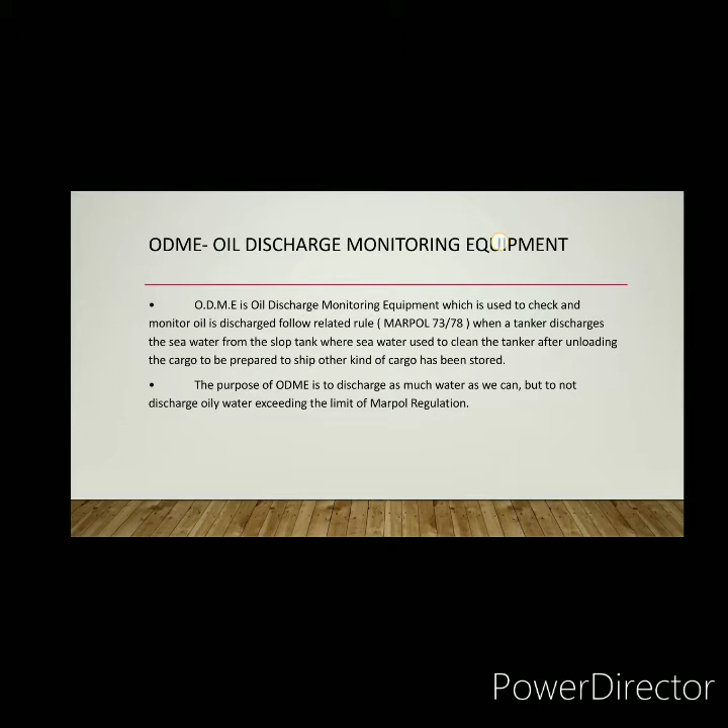Flow rate or flow meter. The ODME computing unit gets the flow rate from the flow meter. A small sample line goes from the main line, passes through the flow meter, and goes back to the main line. The flow meter calculates the flow in m3/hr and gives this value to the computing unit through the signal cable.

So measuring ppm, it is the analyzing unit. We measure ppm in a water sample. The sample water is passed through a quartz glass tube. A sample from the discharged water needs to pass through the measuring unit. This job is done by a sample pump.

The sample pump will take the sample from the discharge line before the discharge valves. This sample is sent to the analyzing unit for measuring the oil content and then sent back into the same discharge line. So this is the process of how it is done.

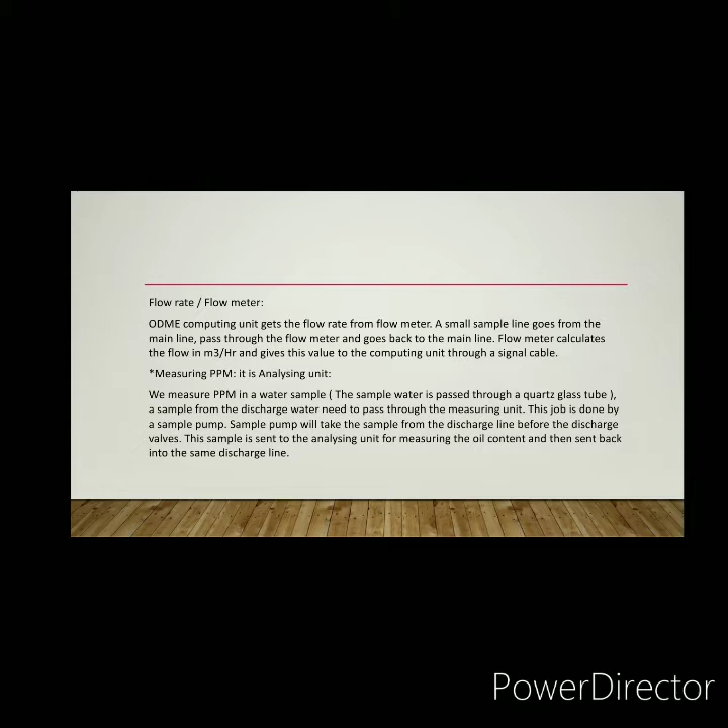and shall be available for use in other tanks where the separation of oil and water is effected and from which it is intended to discharge effluent direct to the sea. An oil water interface detector is an electrical instrument for detecting the boundary between oil and water in tanks. However, the equipment is not limited to oil or water application, but can be used whenever an accurate interface control between two liquids is necessary.

Generally, both fixed and portable type interface detectors are an important part of cargo operation equipment on ships. The portable ones are more widely used because of the ease of handling and maintenance. How an interface detector on ships works: the interface detector consists of two main parts, the sensor antenna and the display control system.

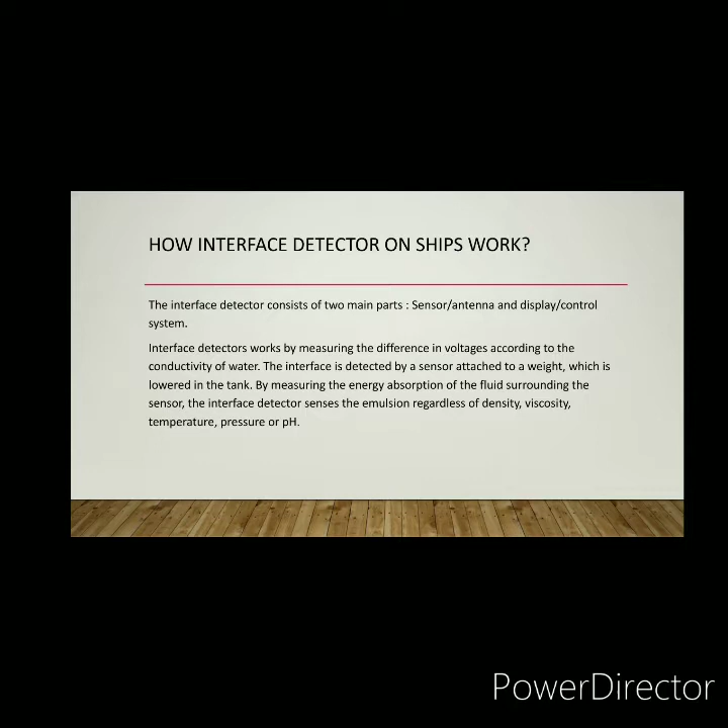Interface detectors work by measuring the difference of voltages according to the conductivity of the water. The interface is detected by a sensor attached to the weight, which is lowered in the tank, by measuring the energy absorption of the fluid surrounding the sensor, and the interface detector senses the emulsion regardless of density and viscosity, temperature, pressure, or pH. So that is how the interface detector works.

Let's proceed to another equipment. What is an oily water separator, or OWS? An oily water separator, or OWS, is a piece of equipment specific to the shipping or marine industry. It is used to separate oil and water mixtures into their separate components.

They are used to separate oil from oily wastewater, such as bilge water, before the wastewater is discharged into the environment. This discharge of wastewater must comply with the requirements laid out in MARPOL 73/78.

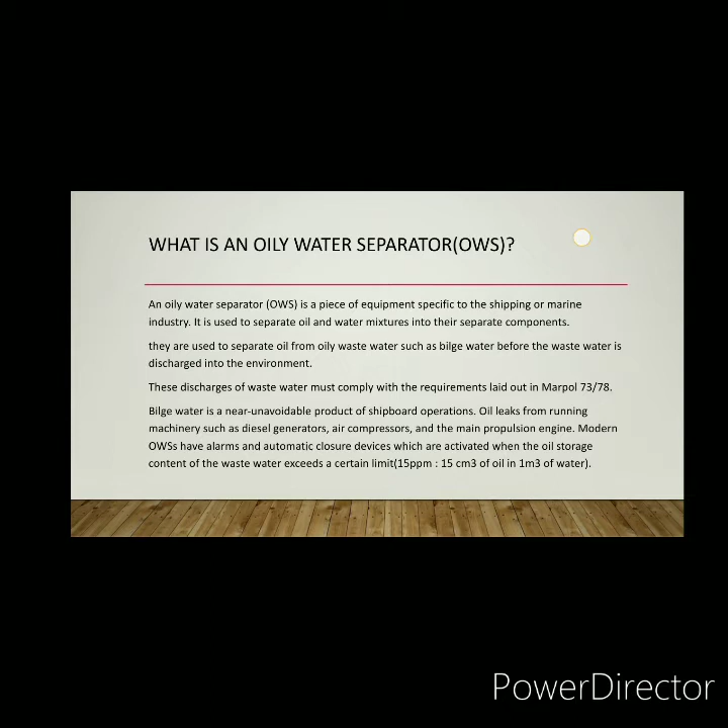So what is the purpose of OWS? The primary purpose of a shipboard oily water separator is to separate oil and other contaminants that could be harmful for the oceans. Each OWS must be able to achieve clean bilge water under 15 ppm of type C oil or heavily emulsified oil and any other contaminants that may be found.

All oil content monitors (OCM) must be tamper-proof. Also, whenever the OWS is being cleaned out, the OCM must be active.

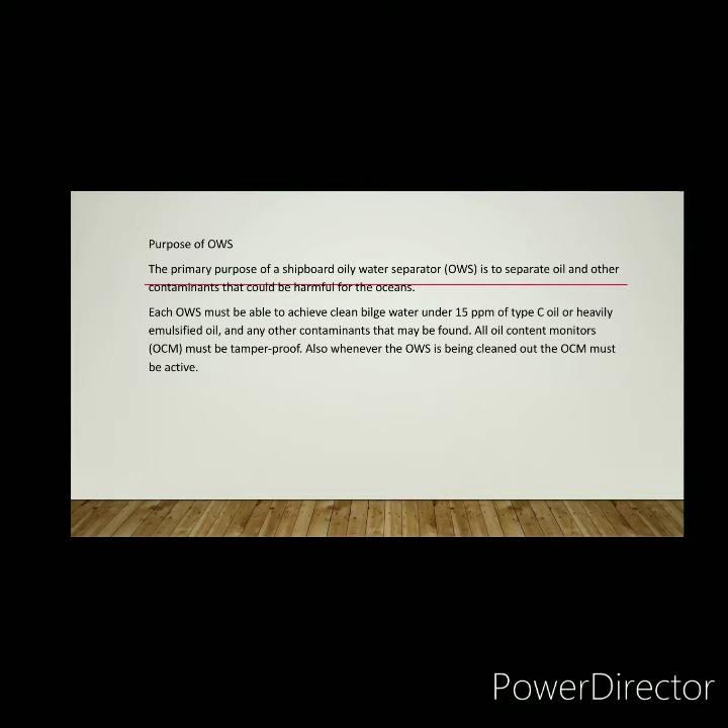So what is a port facility reception? The merchant fleet of ships in the shipping industry is generally divided into two main categories: dry ships, which carry dry cargo in bulk, and wet ships, which carry liquid cargo in bulk. Both of these types of ships generate oily residue mixture and garbage during their normal shipping and cargo carrying operation at ship and at port.

The oil residue mixture and garbage generated by the vessel cannot be discharged directly to the sea as per the law to avoid marine pollution, and hence they are disposed to the port reception facility all around the world.

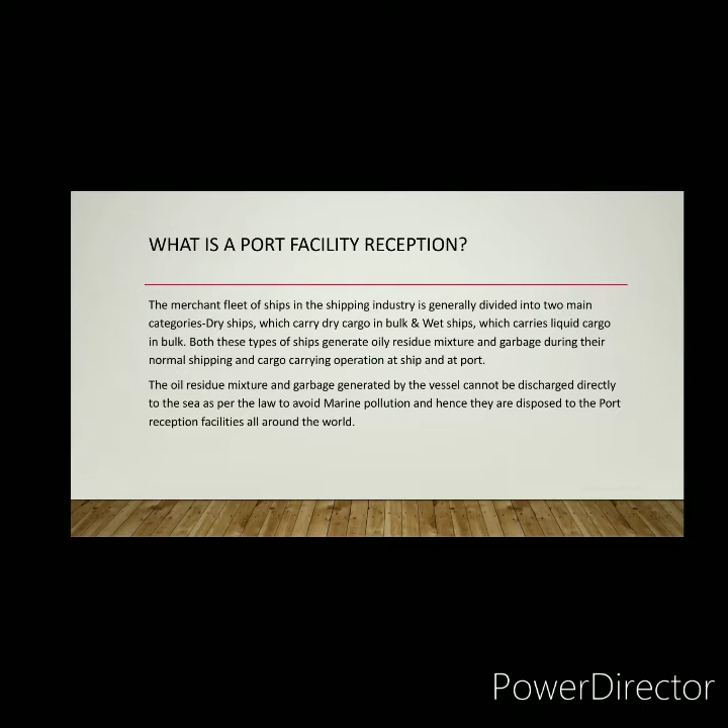What is Ship Oil Pollution Emergency Plan, or SOPEP? So it is a prevention plan carried on board tankers greater than 150 gross tonnage and other vessels greater than 400 gross tonnage. So in this plan, you'll get an overview of possible procedures in case of an oil spill and what is the purpose of the plan.

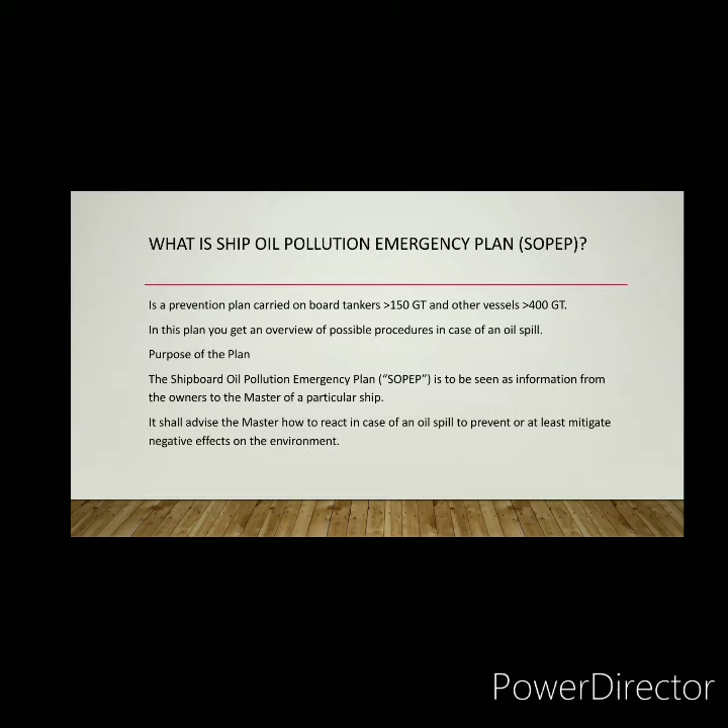So the Shipboard Oil Pollution Emergency Plan, or SOPEP, is to be seen as information from the owners to the master of a particular ship. So it shall advise the master how to react in case of an oil spill to prevent or at least mitigate negative effects on the environment.

So International Convention for the control and management of ships' ballast water and sediments. So BWM. Entry into force 12 months after ratification by 30 states, representing 35% of world merchant shipping tonnage. In order to reduce the harmful effect on the marine environment that is spread through aquatic microorganisms transferred from one area to another through ballasting operations of the ship.

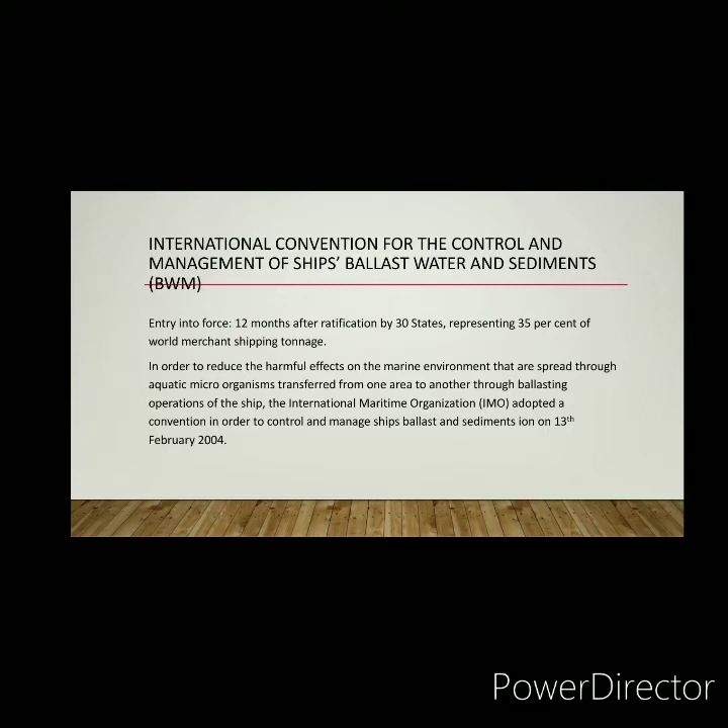So the International Maritime Organization or IMO adopted a convention in order to control and manage ships' ballast and sedimentation on 13th February 2004. So kani siya nakuha na siya nga kuan in order to control and manage ships' ballast and sedimentation.

Advantage of ballast water management plan. With the help of a proper ballast management plan and some additional information, operational delays can be avoided, which will help to save time and money. Reporting requirements to different port state authorities is simplified. And the most important of all is that a safe ballast exchange can be carried out anywhere in the world. So, free ni siya sa tanan.

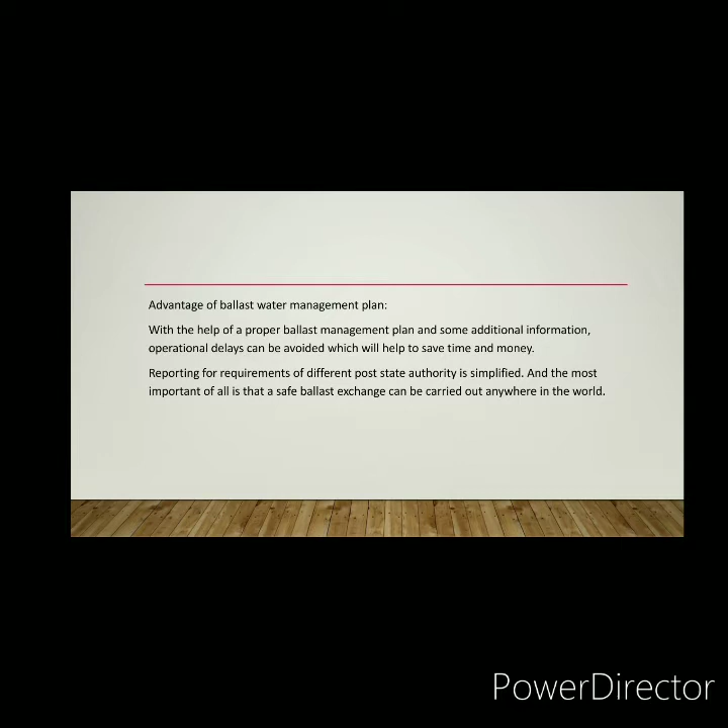We are done with our topic 1, which is the different equipment. So, let's proceed to topic 2, which is the different documents required by the annexes. So, first, the International Oil Pollution Prevention or IOPP certificate. It is required by MARPOL Annex 1, Regulation for the Prevention of Pollution by Oil. Regulation 6, oil tankers of 150 gross tonnage and above and other ships of 400 gross tonnage and above.

So, what surveys are required? Initial survey, renewal survey every 5 years, intermediate survey not earlier than 6 months before and not later than 6 months after the halfway date of the period of validity of the certificate. And annual survey within 3 months before or after each anniversary date of the certificate.

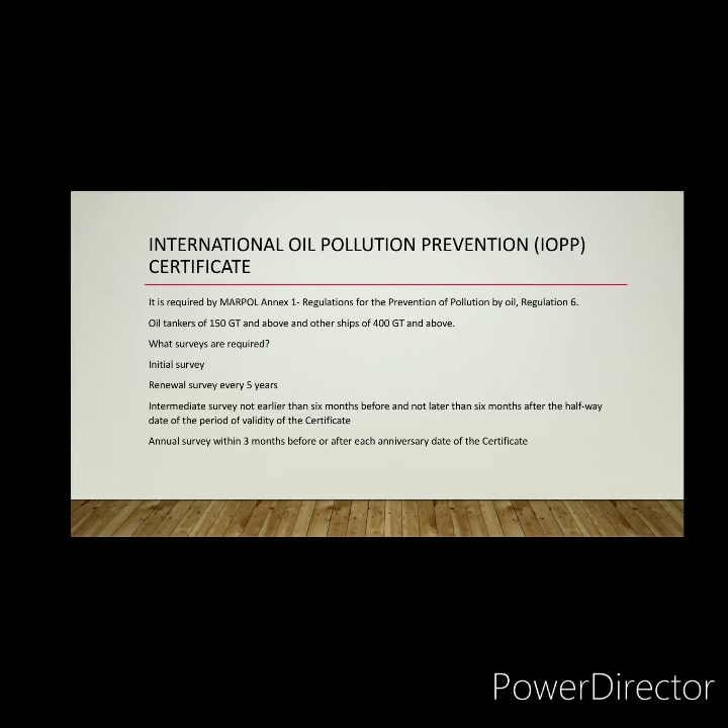Supplement to the International Oil Pollution Prevention Certificate. So, supplement to the IOPP, the equipment listed. These records will be permanently attached to the IOPP certificate and form a useful guide to the scope of an IOPP survey. There are two formats for this supplement. Form A is record of construction and equipment for ships other than oil tankers, and Form B is record of construction and equipment for oil tankers.

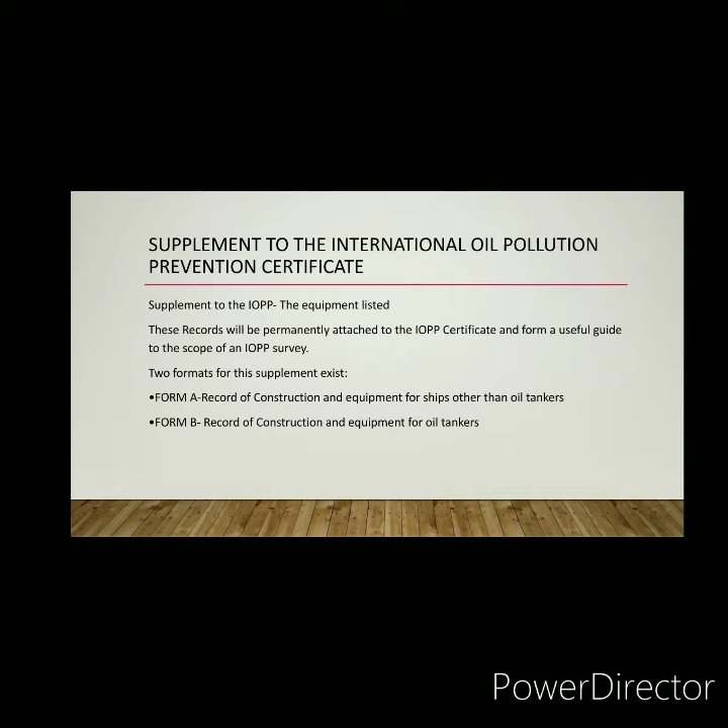So the Form A is record of construction and equipment for ships other than oil tankers. So particulars of ship, equipment for the control of oil discharge from machinery space bilges and oil fuel tanks, MARPOL Regulation 16 and 14. Means for retention and disposal of oil residues or sludge, MARPOL Regulation 12, and oily bilge water holding tanks.

And the Form B is the record of construction and equipment for oil tankers. So, same as the previous one, particulars of the ship, the equipment for the control of oil discharge from machinery space bilges and oil fuel tanks, MARPOL Regulation 16 and 14. So means for retention and disposal of oil residues or sludge, MARPOL Regulation 12, and oily bilge water holding tanks.

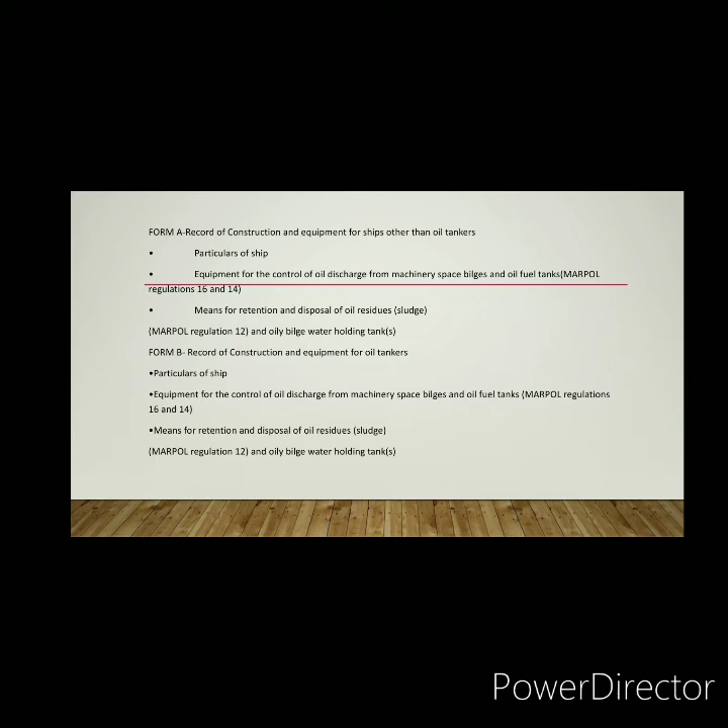International Pollution Prevention Certificate for the carriage of noxious liquid substances in bulk. The NLS certificate, carrying chemicals. Why is it required? It is required by MARPOL Annex 2. What does it certify? That the ship has been surveyed in accordance with Regulation 8 of Annex 2 of MARPOL, that the survey showed that the structure, equipment, systems, fittings, arrangements, and material of the ship and the condition thereof are in all respects satisfactory, and that the ship complies with the applicable requirements of Annex 2 of MARPOL.

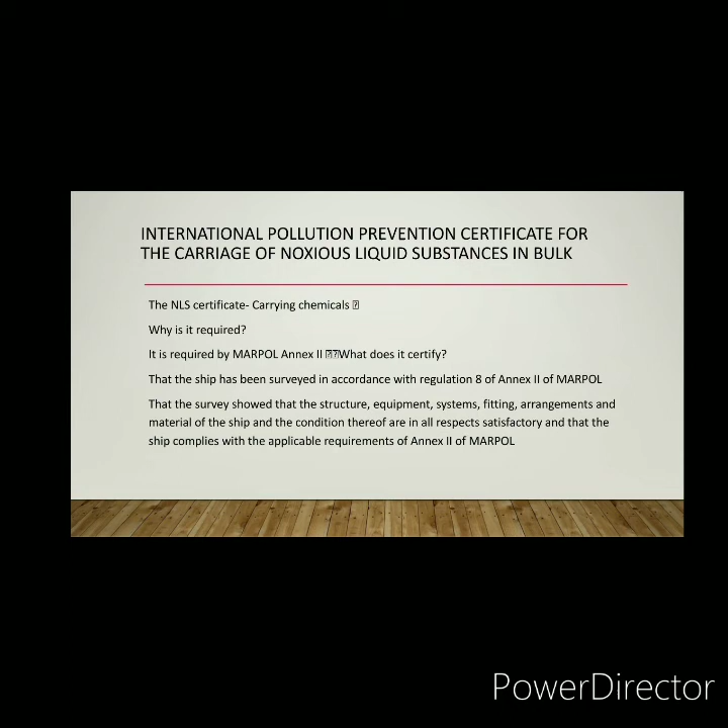So what are NLS categories? So category X, noxious liquid substances which if discharged into the sea from tank cleaning or deballasting operations are deemed to present a major hazard to either marine resources or human health, and therefore justify the prohibition of the discharge into the marine environment.

So the category Y, noxious liquid substances which if discharged into the sea from tank cleaning or deballasting operations are deemed to present a hazard to either marine resources or human health, or cause harm to amenities or other legitimate uses of the sea, and therefore justify a limitation on the quality and quantity of the discharge into the marine environment.

So the category Z, noxious liquid substances which if discharged into the sea from tank cleaning or deballasting operations are deemed to present a minor hazard to either marine resources or human health, and therefore justify less stringent restrictions on the quality and quantity of the discharge into the marine environment. So category X presents a major hazard. Category Y is hazardous but not major, and category Z is a minor hazard.

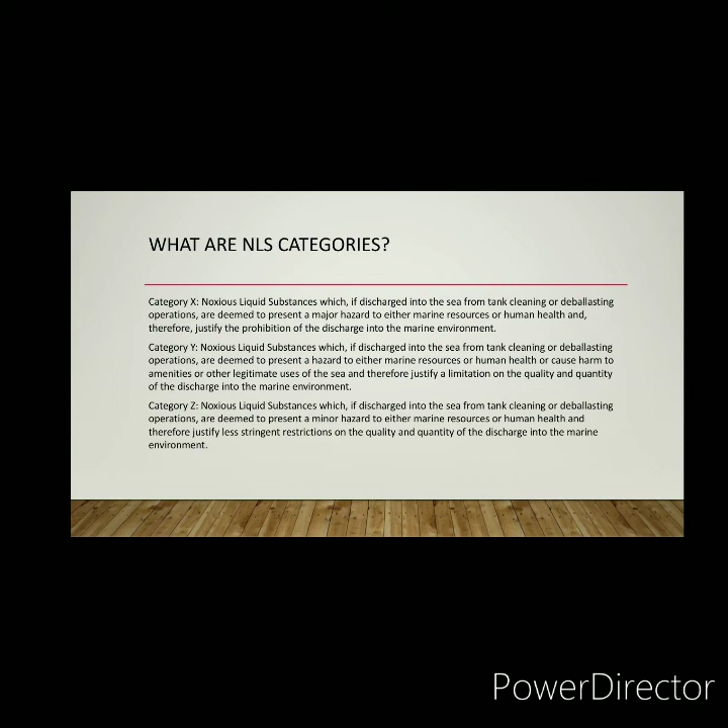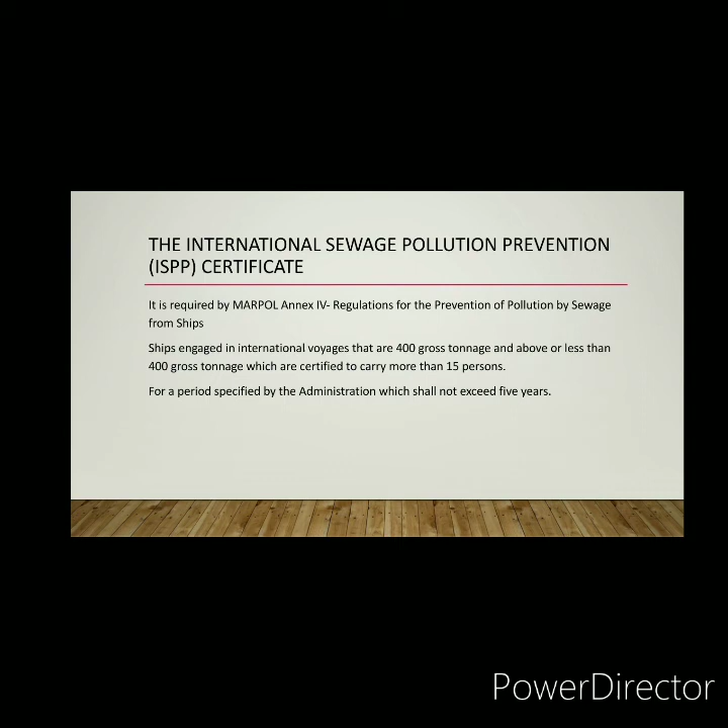The International Sewage Pollution Prevention or ISPP certificate. It is required by MARPOL Annex 4, regulations for the prevention of pollution by sewage from ships. Ships engaged in international voyages that are 400 gross tonnage and above, or less than 400 gross tonnage which are certified to carry more than 15 persons, for a period specified by the administration, which shall not exceed 5 years.

International Air Pollution Prevention Certificate or IAPPC, keeping the air clean. It is required by Regulation 5 of Annex 6 of MARPOL. Every ship of 400 gross tonnage and above.

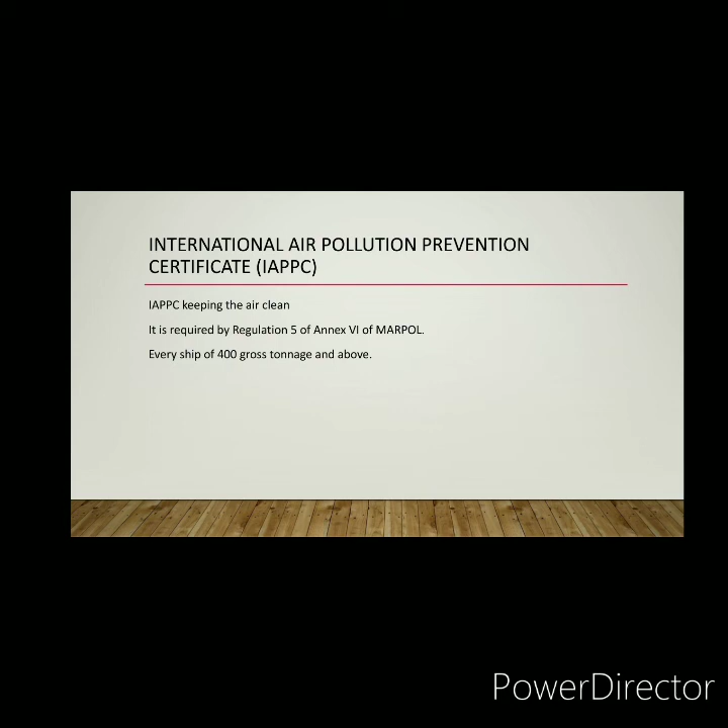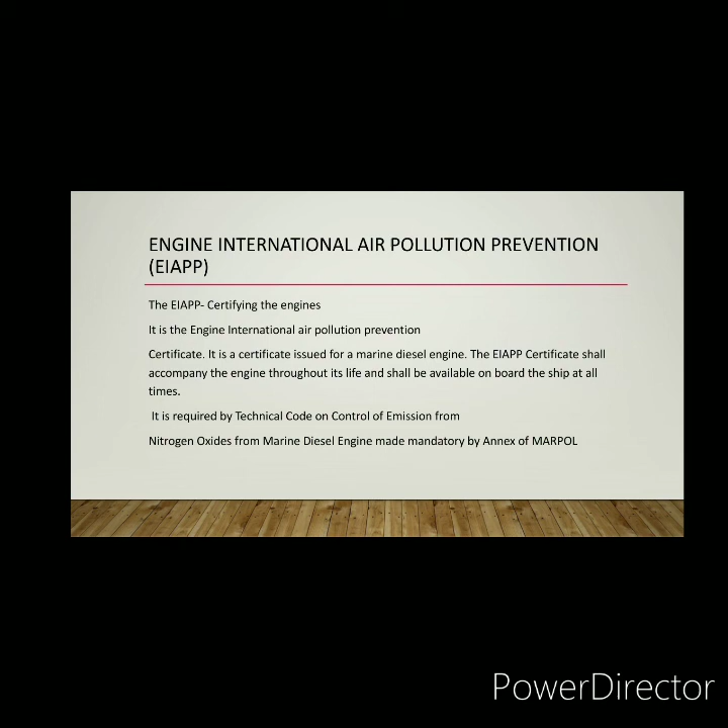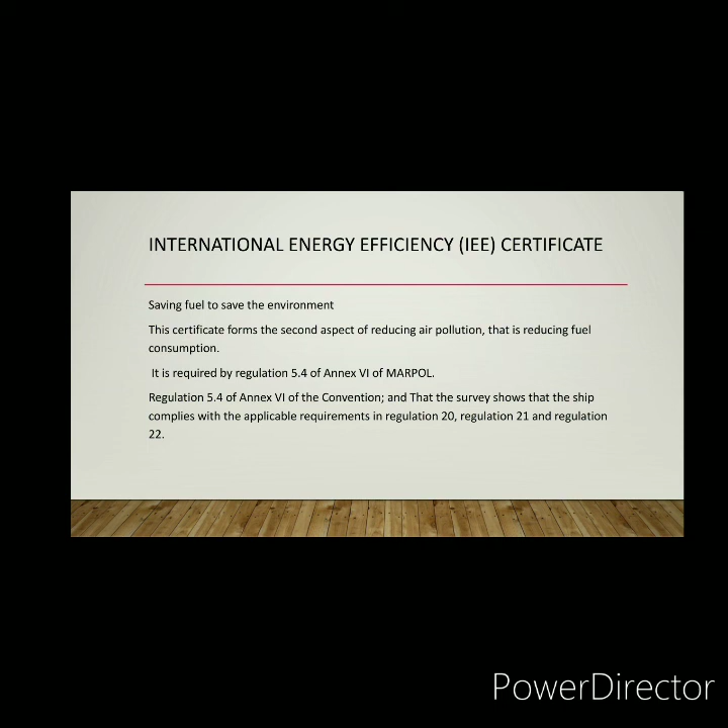So another document, the International Energy Efficiency or IEE certificate. Saving fuel to save the environment. The certificate forms the second aspect of reducing air pollution, that is reducing fuel consumption. It is required by Regulation 5.4 of Annex 6 of MARPOL, and the survey shows that the ship complies with the applicable requirements in Regulation 20, Regulation 21, and Regulation 22.

The International Anti-Fouling Certificate, removing organotin from the seas. It is required by the International Convention on the Control of Harmful Anti-Fouling Systems on Ships, 2001. Anti-fouling system or AFS means a coating, paint, surface treatment, surface, or device that is used on a ship to control or prevent attachment of unwanted organisms. Anti-fouling paints are used to coat the bottoms of ships to prevent sea life such as algae and mollusks attaching themselves to the hull, thereby slowing down the ship and increasing fuel consumption.

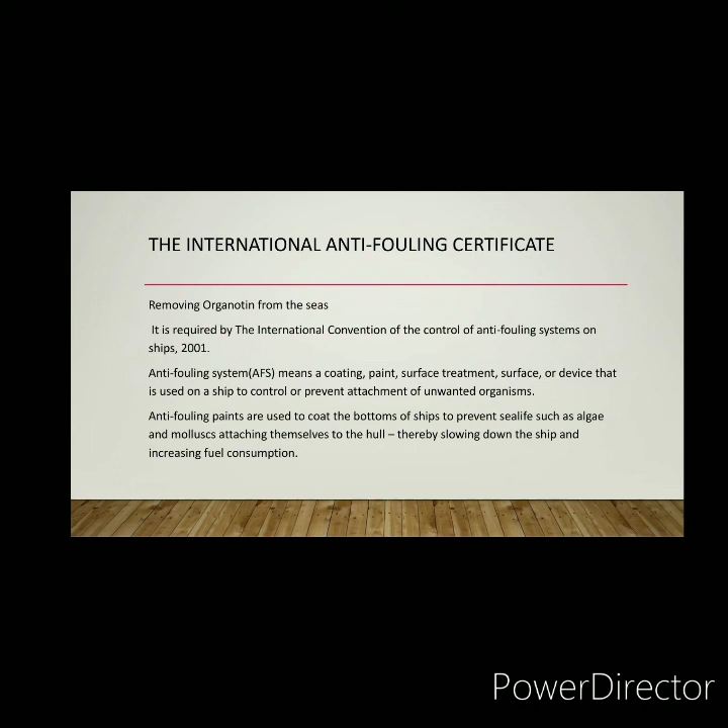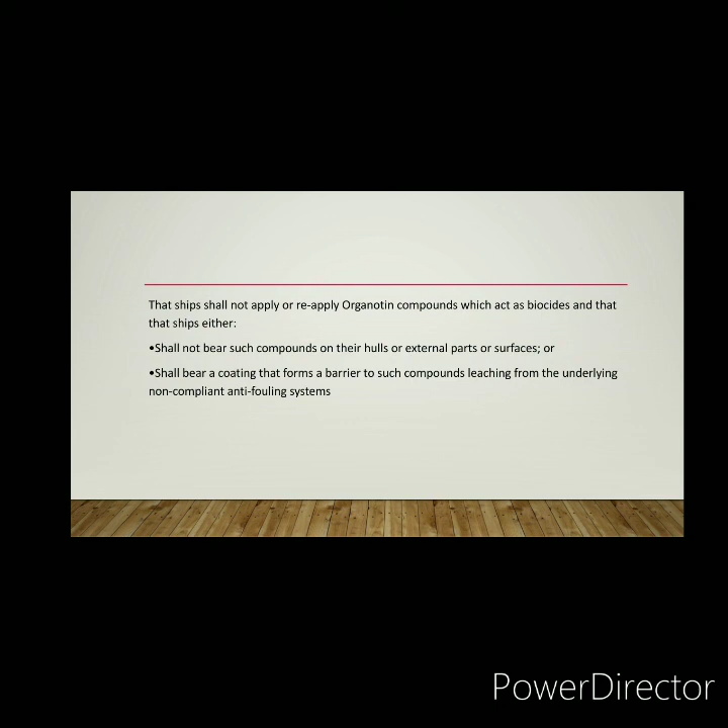So that the ship shall not apply or reapply organotin compounds which act as biocides, and that ships either shall not bear such compounds on their hulls or external parts or surfaces, or shall bear a coating that forms a barrier to such compounds leaching from the underlying non-compliant anti-fouling systems.

So that's all about the documents that are used by ships in order to comply with the annexes. So thank you for watching.